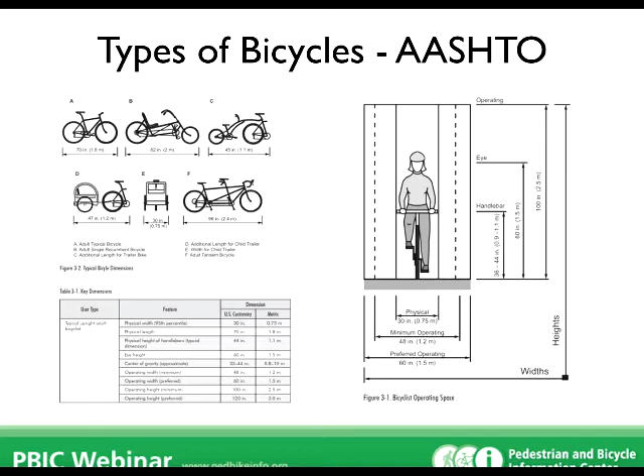It's important to consider the type of trip to a small extent, but generally people take trips for a wide variety of reasons. We don't necessarily design our facilities for a particular type of trip, but it does help inform origins, destinations, and locations you may want to focus improvements on if you're seeing a safety problem somewhere.

It's broken into two general categories: non-discretionary trips, where people need to get somewhere like a job or work, versus discretionary trips, which are more oriented around recreation. Generally, people taking a non-discretionary trip try to take the shortest, fastest route, whereas recreational riders may be willing to take a more leisurely route that isn't as direct.

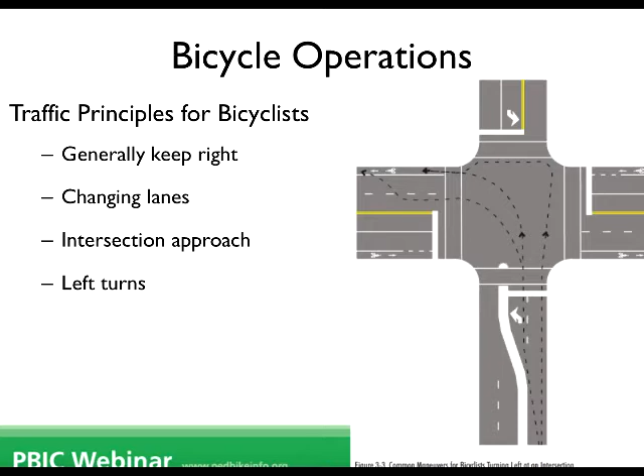Next, I'm going to give a very brief overview of the different types of more typical bike facilities that you would be considering as you're developing a safety action plan. The most prolific and common—and I think will continue to be a very common bicycle facility—is what we like to call the humble bicycle lane.

It's very effective at creating a separate space on the roadway for bicyclists to travel at their own speed with some margin of comfort, being separated from through-moving traffic on the left. Bicycle lanes are typically on the right-hand side of the road, and generally bicyclists, as slower moving vehicles, operate on the right side of the road.

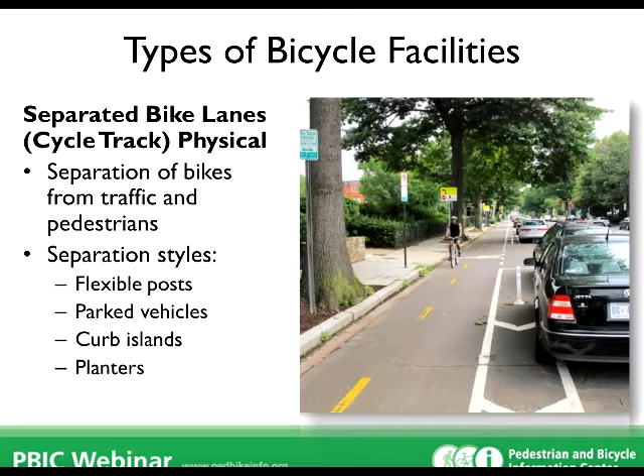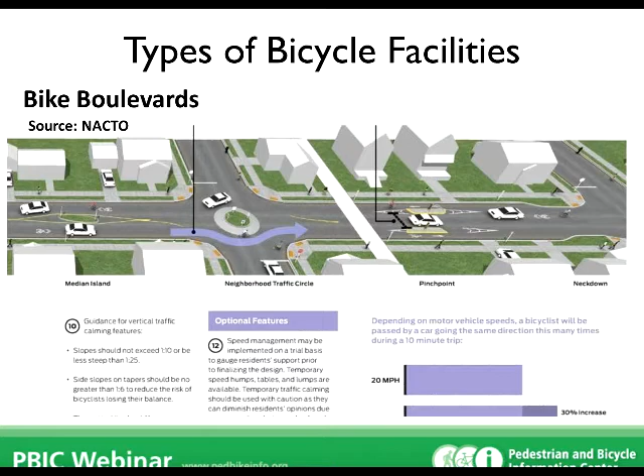We can talk more in the next two webinars and get into more details on facility types, but for the rest of this webinar we're going to focus on planning. So, why plan accommodations for bicycling?

Probably most importantly, bicycling is increasingly popular and on the rise. It's a very convenient, fast, and efficient mode of travel for shorter trips of 2 to 3 miles. It also has side benefits of being fun and very healthy, helping people improve their health. If they're busy with their jobs and don't have extra time to exercise, they can incorporate it into their work trip. It's also a critical mobility option for people who can't drive, because they don't have a license or choose not to have one.

Bicycle planning is also really important for society. Again, the health aspect can't be understated. We have an obesity epidemic in the United States, and to the extent people can incorporate exercise into their normal daily activities, it can help address that. Bicycling certainly plays a very important role in that.

Bicycling also helps reduce transportation-related energy costs. Obviously it's a clean vehicle, it doesn't emit any pollution, and it has a lot of benefits in helping to reduce traffic congestion.

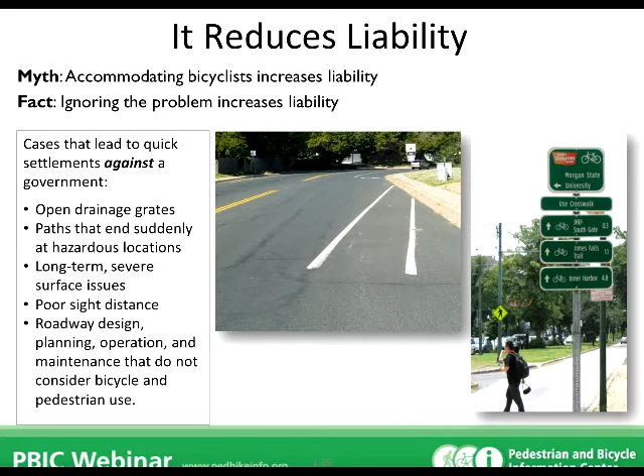There's a number of resources on this liability topic, but there's a very good one that the Federal Highway Administration put together on tort liability and risk management in July 2006. So if you have any concerns about the liability aspects, we'd encourage you to look at this resource document. But a main point here is that it's really no longer acceptable to not consider bicyclists and pedestrians in any safety project or any transportation project generally.

Lastly, and probably more importantly, communities are competing with each other for residents, for workers. There's an aspect of economic competitiveness here, that accommodating for cycling is a really important strategy for cities to compete for jobs, to compete for talent. You're seeing more and more mayors coming out and saying that they want to be the most bicycle-friendly city in the United States. The League of American Bicyclists has done a great job with their community ranking series, which I think has helped foster a little bit of that competitiveness.

But at the end of the day, the general public recognizes a healthy, livable community as a desirable place to live, and often those communities have cycling as a very big element of their community.

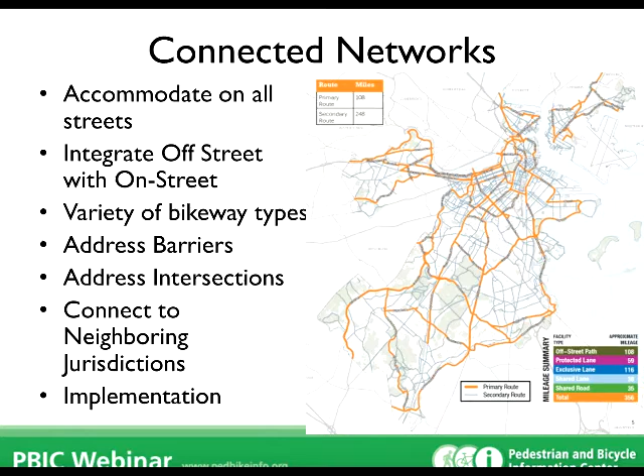So you may have a network of bicycle lanes, ideally all connected to each other; a network of trails; maybe a network of low-volume local streets that you turn into bicycle boulevards. But those are just some examples. You should be trying to address barriers and intersections, and very importantly, connecting to neighboring jurisdictions so that there's good connectivity within your community and external to your neighbors.

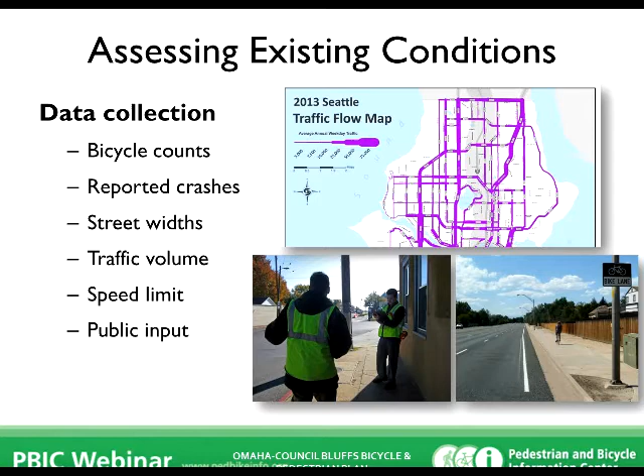Walking you through how this plan is generally set up: you start with a good assessment of existing conditions. That's where you may look at your local crash history, get reports where traffic counts are available for automobiles, and get a sense of which streets are higher volume, where cyclists would want a higher degree of comfort and a higher level of separation from traffic. There may even be streets you prefer to avoid, using parallel lower-volume streets as alternatives. These are just a few of the factors to consider as you're looking through this.

Another aspect to help you plan where to make improvements, and ultimately how to prioritize which improvements should be implemented first to address safety issues, is to do a demand analysis. Typical features of a demand analysis include considering land use, which is really important, and in some cities, terrain. You'd also want to understand the origins and destinations that bicyclists prefer.

And then, what are the major barriers you need to overcome? It could be rivers, railroads, interstates — those are all very common barriers. When you have a series of barriers like that, they can become focal points for safety concerns, because you get high intense traffic crossing only at limited bridge crossings or railroad crossings, for example, where everyone's funneling together. So those can be places where you may have a safety problem that you'd like to address.

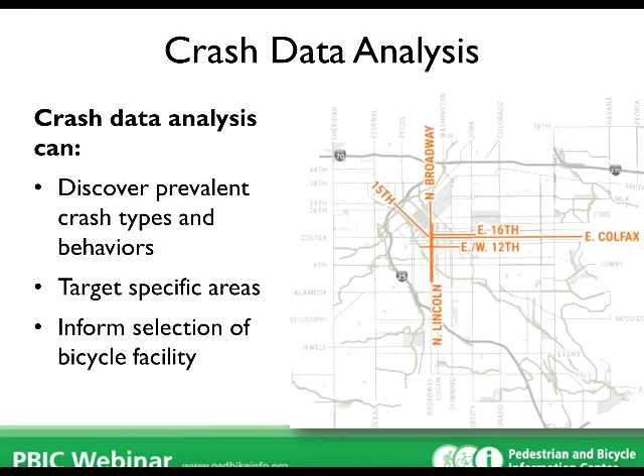One thing to understand is that crash data doesn't account for near misses. Through dialogue with the public, you'll learn people have many more near misses than actual crashes. You may even find intersections with no crashes but frequent near misses, and the public would say that location needs improvement. So it's important to balance crash data with public input.

This is an example from Cambridge, Massachusetts, where a lot of public input into locations of concern for safety helped visualize corridors to focus on for potential safety improvements or bike lane infrastructure improvements.

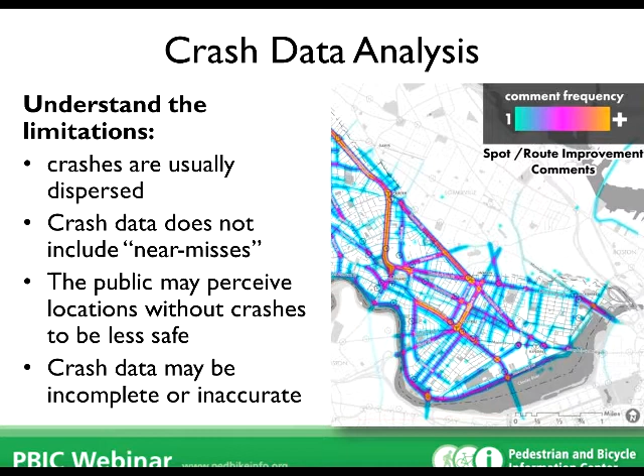Once you get out and look at the ground to figure out what improvements to make, you can look for clues. Here's a person riding on the sidewalk even though there's a bicycle lane. Why? It's likely not a comfortable environment for them on that roadway—it's a pretty wide road with high-speed traffic even if posted lower. The gutter is about 2 feet wide and the bike lane asphalt portion is about 2 feet wide, with the gutter right in the middle. So this facility isn't appealing to the cyclist, and they've chosen to ride on the sidewalk. These are the types of things you might be looking at.

Other factors include looking at the overall spacing of bikeway networks relative to each other. Is this the only option a person might have in a corridor? You should spend a little more time trying to improve a facility to make it work.

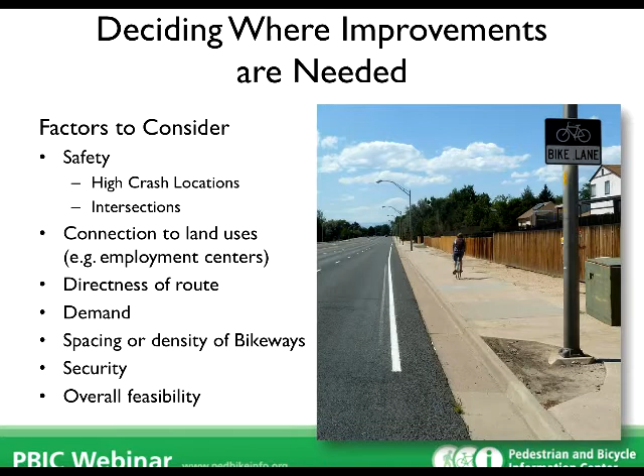Once you've got a handle on the types of crashes, corridor challenges, geometries, and intersection operations you need to tackle to improve bike safety, a great resource is pedbikesafe.org. It has a whole website dedicated to potential countermeasures—a great place to educate yourself on techniques and mitigation strategies to offset and correct certain types of crashes or behaviors.

When it comes to choosing facilities, there's an increasingly diverse range available, from traffic calming and shared streets all the way to fully separated cycle tracks and trails. The main thing to consider is your relationship to available space—whether you can remove parking or a travel lane to create more space—and your budget. Can you reconstruct a roadway to add a trail, or do you have less money, in which case you can only restripe and maybe add a bicycle lane?

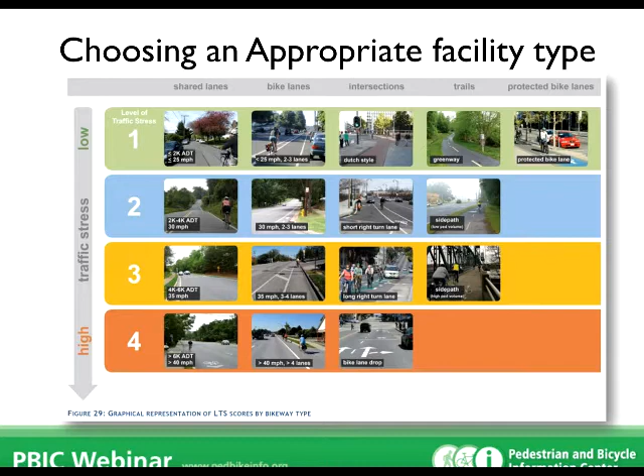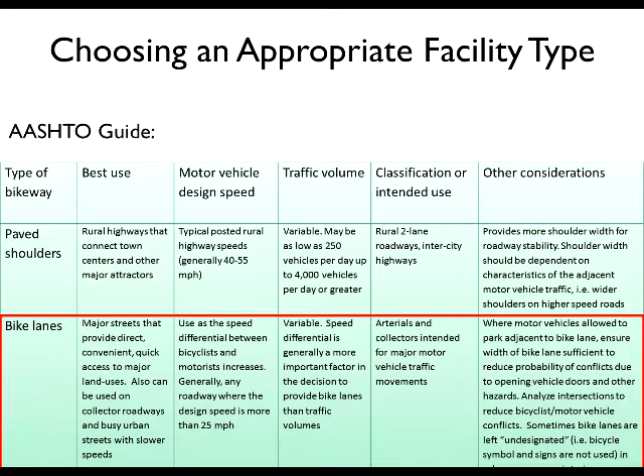The AASHTO guide also provides guidance based on different types of users and what facilities they might prefer. This is just one example from the guide, but it talks about the appropriateness of bike lanes and under what conditions you might apply them to your network.

Once you've assessed your crashes, or you've got a sense at a location of what the more common crash types are, what you'll find is that these types of crashes generally rise up to the top. This data comes from looking at the NHTSA data, but these are the most common actual crashes nationwide that you'll find a bicyclist getting into an accident.

Number one is wrong way riding, whether that be on a sidewalk or on the street. That's typically a very prominent source of crashes in the community. Sidewalk riding is often number two.

Dooring is a crash where a motorist gets out of a parked car and strikes a bicyclist riding adjacent to them. That crash can be more prevalent in cities that are very dense with a lot of on-street parking.

Bicyclists being struck from behind is not an uncommon crash. They tend to be more fatal in suburban, rural areas where traffic speeds are higher.

And lastly, another very common type of crash is just bicyclists or motorists failing to yield. They're all in the proper place, but they're just failing to follow traffic control devices or to follow the standard right-of-way rules at an intersection.

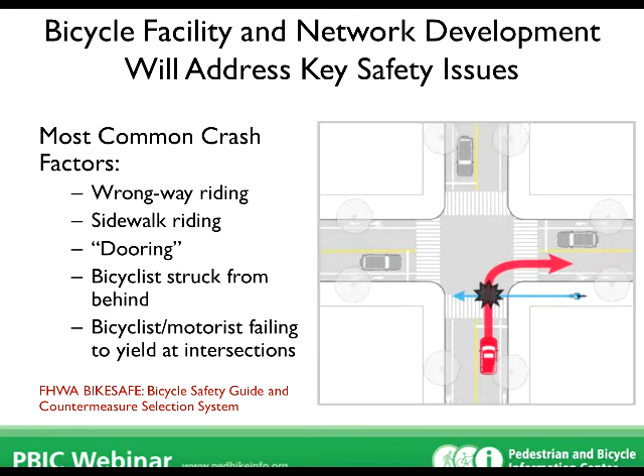So I'm going to give you a few examples, and this is kind of a teaser for the next few webinars so we can get a little bit more into detail on it. But how would you address, deal with a safety issue? So say in your community, wrong way riding is a prevalent cause of crashes.

Well, all of these facilities are potential solutions, from bicycle lanes, which would encourage bicyclists by giving them their own separate space on the roadway to come off of sidewalks, feel more comfortable riding the street. They've been proven to help reduce wrong way riding.

A newer innovation is the cycle track or protected bike lane. This is a great example, City of Denver, where they had a one-way street, but they had a lot of cyclists riding the wrong way up the one-way street because there were challenges with their downtown street connectivity.

So instead of trying to ticket everybody and cause them to have to go a long way out of their way, what they did is they actually repurposed a portion of the sidewalk and created this off-street separated cycle track. It's a very slick solution to deal with wrong way riding.

So they legitimized it because they were meeting a need, and there was a high demand for this movement because it created a very direct connection between two important links in their bikeway system. So that's another example type of solution.

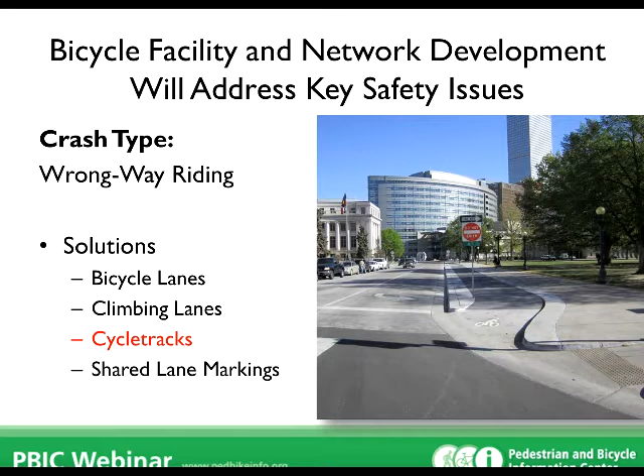And lastly, another one, a simple one, is shared lane markings. Shared lane markings are not as effective as the other treatments from pulling people off sidewalks because you're still sharing the road with traffic, but they still have shown some great benefits in getting people to ride with traffic and to take a stronger position in the roadway relative to traffic.

So during the construction, they installed bicycles may use full lane signs and a large quantity of shared lane markings in the roadway to really emphasize to all the users out there that bicyclists belonged in the road and should be out in the road to operate safely.

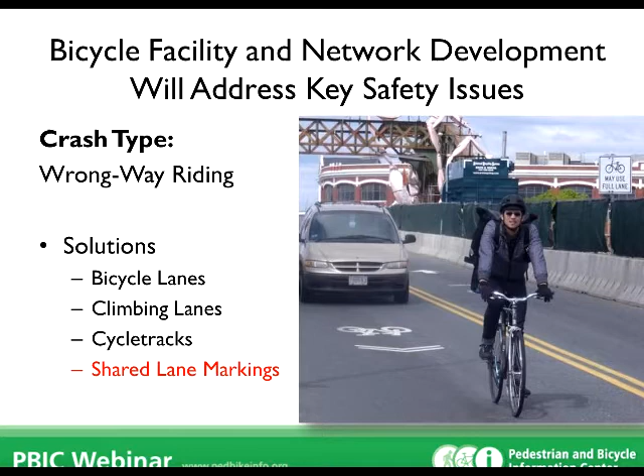31% of injuries occurring between 6 p.m. and 6 a.m., being dark, being not visible. So developing programs and education strategies that orient people around being visible, wearing brighter clothing, or making sure they have lights on their bicycles and reflectors can help address that type of crash.

Dealing with alcohol, same as motorists, there's a prevalence of fatal bicycle crashes being associated with alcohol. So through your marketing campaigns, make sure to address the belief that it's okay to drink and ride, that it's not as dangerous as drinking and driving. Slick marketing campaigns can help people understand they can be equally as dangerous.

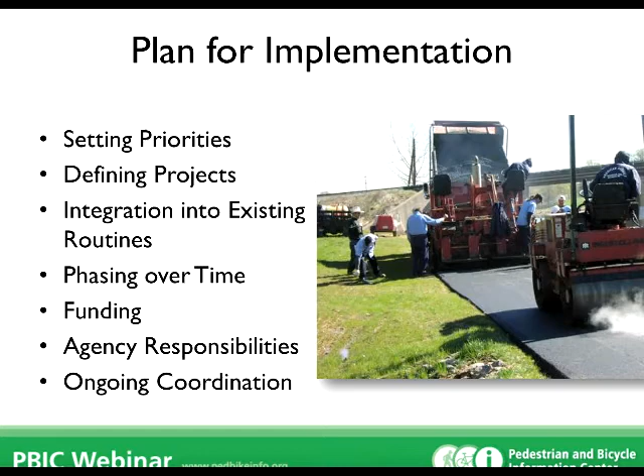So that's going to wrap up the presentation. Just a reminder that we have the next webinar on October 16th, where we'll talk in more detail about on-road bike facilities and how they relate to improving safety, and we'll conclude this series on October 30th with off-road facilities.

So James, I'm going to turn it back to you. All right, thank you very much, Bill. Pete, I believe we have you on the line now? I'm here. Great. And Dan, are you still on the line? All right, I don't think Dan's on the line.